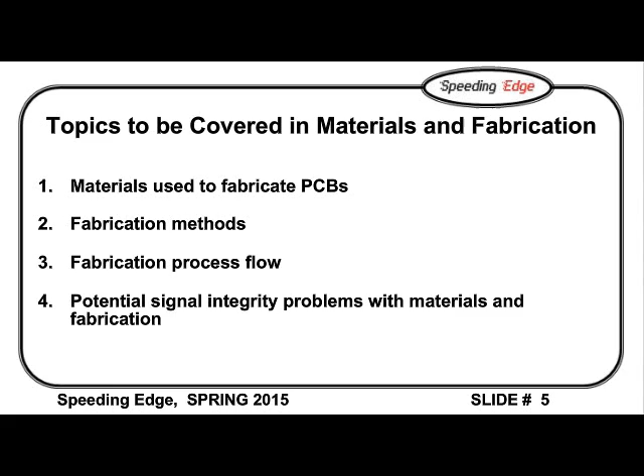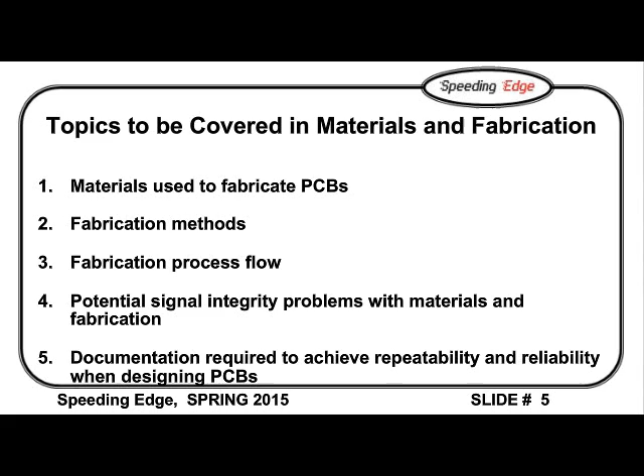So what I'm going to cover are these things, and the materials used to fabricate boards. We need to get much more involved in that. We also need to get involved in how boards are made, and I'll mention the methods that are available to us. You need to know how the flow is conducted in a fab shop so you know where things can go wrong and keep that from happening. And I'll show you some of the SI problems that are traceable to how a board was built or how material was chosen. And then I'm going to close with the documentation that one has to prepare so that the fabricator knows what we're asking for. You'll see later on it's much more extensive than is traditionally done.

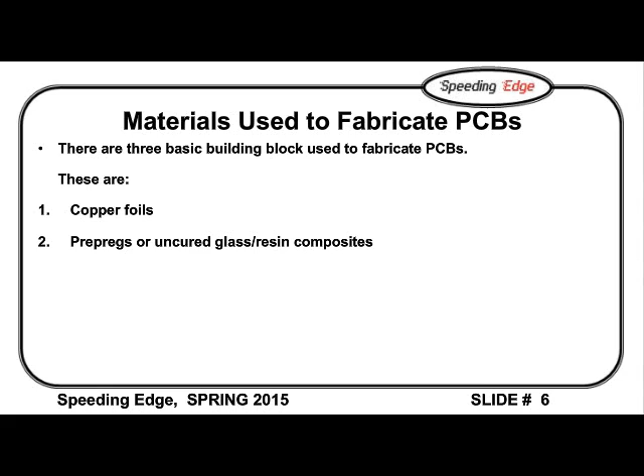So let's look at the materials available to build a board. There are 3 basic building blocks that are involved in building a board. The first one of these is copper foils that form all the signal and power layers. The second is a material called a prepreg, which is glass cloth saturated with resin which has not been cured. That will be the glue that makes our board stick together during lamination.

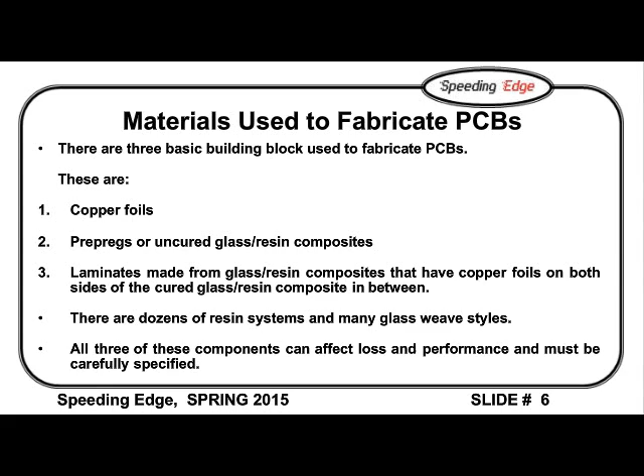Then there are cores, which are that same glass resin composite with foil on both sides that has been cured. And that's going to be all the inside layers of our printed circuit board. And there are dozens and dozens of resin systems out there and lots of different glass weaves, and so many to choose from, many of which are not going to do what we want. And every one of these 3 things can have an effect on performance and loss. And failing to control those is one of the reasons we have disconnects.

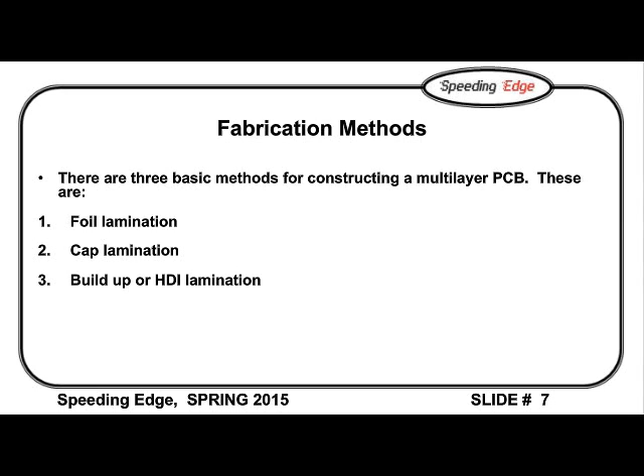So how are boards made? Well, there are 3 basic ways to construct a multi-layer printed circuit board. The first one is what we call foil lamination. Second is what's called cap lamination. The difference between those 2 is between layer 1 and layer 2 of foil lamination is prepreg, and between layer 1 and layer 2 of a cap lamination is cured laminate. And then the third one, which is the workhorse of cell phones, is build-up or HDI, where there is a combination of both 1 and 2.

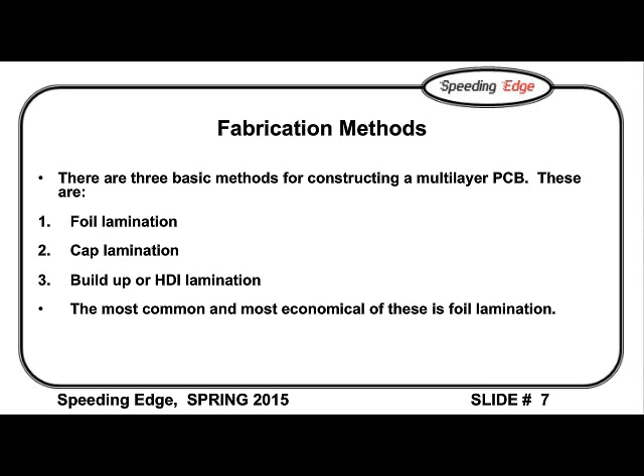And of these, the most common and the most economical is foil lamination, and all of us should attempt to get our jobs done with that. There's lots of good reasons to do that besides economics.

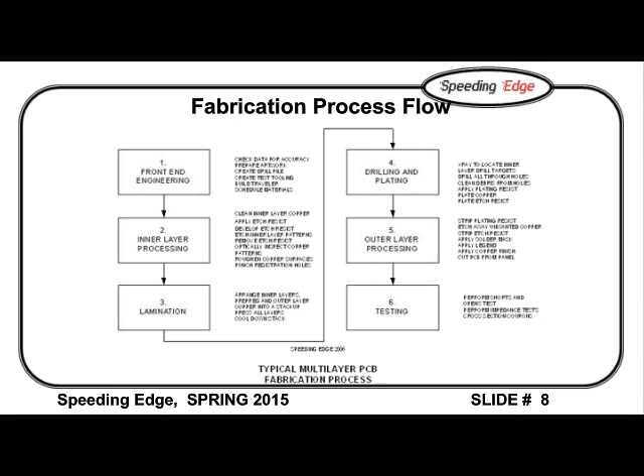Here is the process flow, and this is the flow that would be followed with either foil or cap lamination. All your technical information goes to a fabricator who makes all the tooling involved, and then inner layers are formed 2 at a time on pieces of laminate. Those are combined with prepreg and foil, and the whole pile is run through a lamination step, after which we drill and plate and etch outer layers. And there are 2 or 3 places in that flow that SI can be compromised. I'll mention those in a minute.

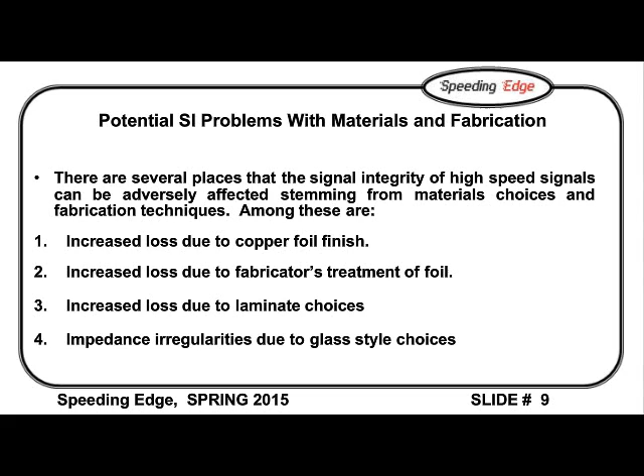So here is a look at part of the data I draw on. In order to have good data to make choices, I have had to build test boards out of everyone's materials so that I get a one-to-one comparison. And this particular data is for one of my test boards where half of the signal layers were real smooth copper and half were the standard copper that we will get if we don't ask for something else. And these are 8-inch traces. The only difference is the foil roughness that came from whoever made the foil.

You can see the blue line is what's called VLP, or very low profile copper, and the green is reverse treat, which is the standard copper. And you'll notice out at 14 gigahertz, which is 28 gigabits per second, there's 2 dB of difference just because of how the foil was manufactured.

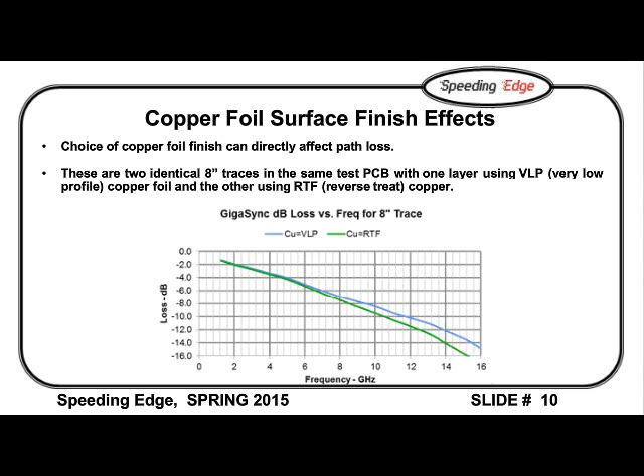There's a couple of pieces of data missing here. I'll fill you in on what that is. This is 2 boards made with the same artwork and the same material at 2 different fabricators. What's missing at the bottom of the 2 graphs is the left one should say 35 dB at 8 gigahertz. The right one should say 40 dB at 8 gigahertz. That is a 5 dB difference and is traceable to how the fabricator treated the copper during the lamination process.

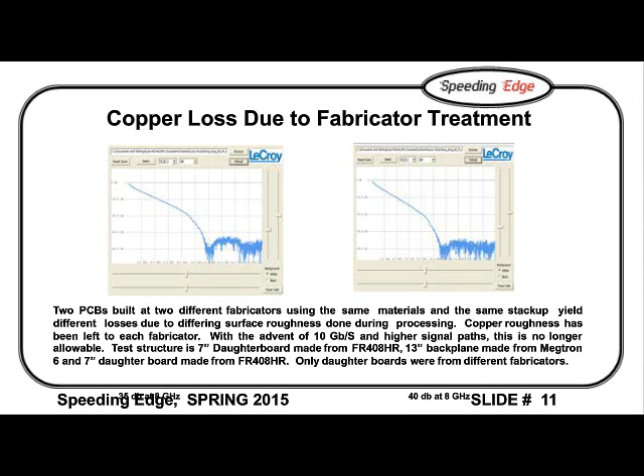Again, at DesignCon, I'll have photos of this so you can see what that looks like. So we are going to have to control how the fabricator does their job to avoid this problem.

And this one next is a chart of dielectrics. The same set of test boards was built, you can see here, 6 different laminates, all made with the exact same test board. And the range of loss is significant, where the red one is what most people call FR4, and the top one, which is blue, is the latest out, called Tachyon from Isola. And so you can see if you don't exercise control over the laminate, you get wide swings in what the loss looks like.

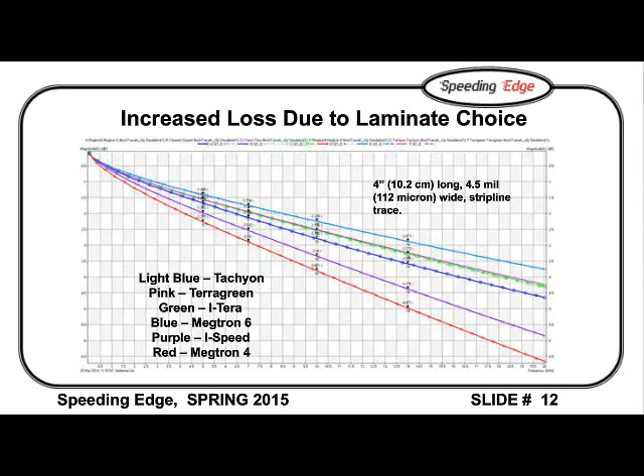Here we have a picture of 2 glass weaves commonly used to make printed circuit boards. The one on the left, 1080, has been the workhorse for as long as I've been in the business to make a 3 mil core, or in some cases a 4 mil core. And on the right is 3313 glass weave used to make a 4 mil core. And you can see the difference between the two is in how the glass is distributed across the surface. On both of those, there is a 3.5 mil wire to give you scale of what a trace looks like compared to the weave of the glass cloth.

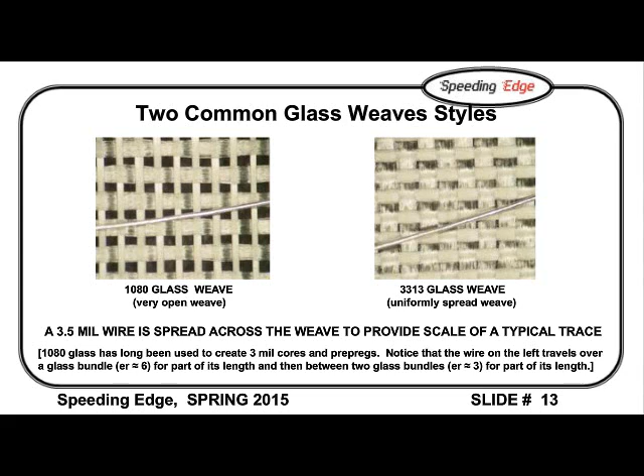Notice on the left side that with 1080 glass, the wire is for part of its length on top of the glass bundle and for part of its length in between. What's going to turn out there is, because the dielectric constant of glass and resin is so different, where the trace is on top of the glass bundle will have a low impedance, and in between glass bundles a high impedance, and those variations are going to cause reflections along the line that are unanticipated, and that shows up as 2 things. One is loss, and the other, outside the topic of today, is this is where skew comes from.

And this slide shows impedance versus time for those 2 traces on the last slide. On the left-hand side is the 1080 glass. This is one trace running over on the same layer, all same width from one end to the other, and you can see how widely the impedance swings. Where the line dead through the middle is 50 ohms, the top line is 55, and the bottom line is 45, which is the typical plus or minus tolerance of a fab shop.

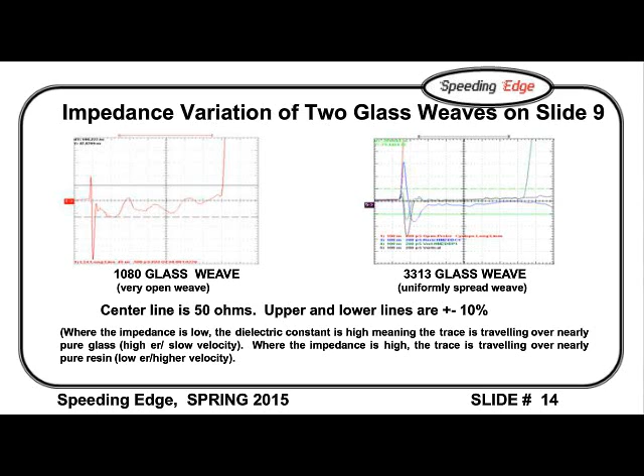On the right-hand side is 3313, which is called spread glass. You'll notice that the impedance is very nearly flat along the length of the transmission line. And so what we have learned the hard way is one of the things you want to make sure always is that your high-performance boards are made from spread glass. Now, the rub is going to turn out to be how do you define spread glass. It's outside the scope of today, but we're working on that one.

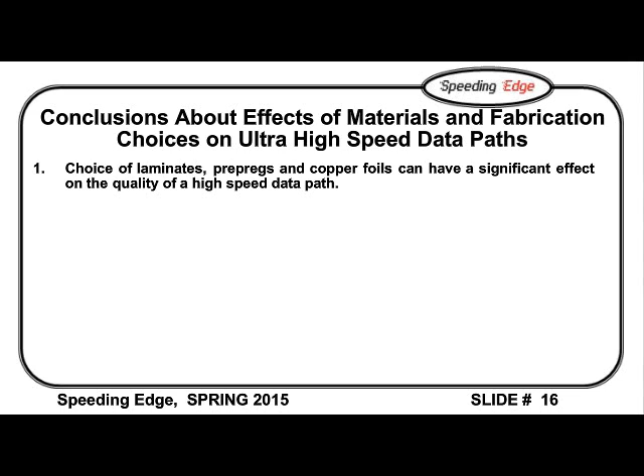One of the things I've tried to illustrate here briefly is that your choice of laminates, prepregs, and foils can have a significant effect on the quality of your high-speed signal path. The current practice in fabricators doesn't account for the things that I have shown you here, and that has, again, a lot to do with why we have correlation problems. There are two other reasons that Heidi and Al will talk about, but these are the ones that you will see stem from how the board was made.

So here's the good news. First of all, we need to control these parameters if we want to get repeatable results. Then we've got to prepare documentation that is complete enough so we get what we were looking for. And this last bullet I added because we have allowed fabricators in the industry to change things on our stackup to suit whatever their current inventory is or practices, and that is, to be mild, hazardous, so that has to stop.

We're bit by bit getting fabricators trained this way, but it's a habit, and unfortunately, I've seen fabricators change things and not tell me, and I get to throw away a lot of boards. A whole other topic is how do you keep that from happening. That's the basic intro I wanted to put together to set the stage for the next two sections.

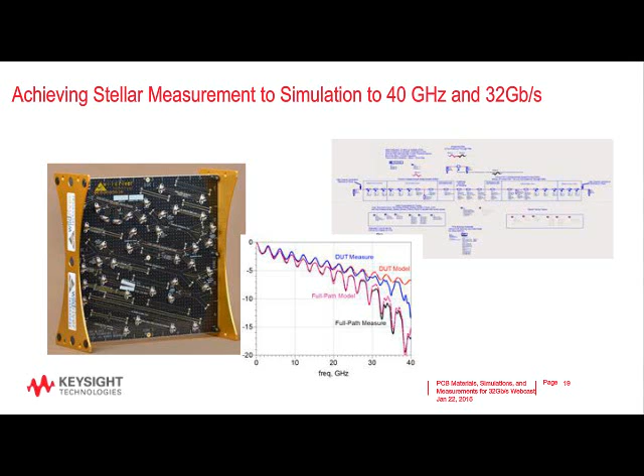So multi-layer laminate printed circuit boards are everywhere in today's electronics. One would think that a technology that has been around for more than 50 years would be easy to simulate and measure, and yet for the niche of high-speed signal integrity applications, it is not easy. In part one, Lee Ritchie did a great job in explaining how PCBs are fabricated and the key features controlling high-frequency performance. Now I'm going to demonstrate a methodical approach to achieve stellar simulation to measurement correlation to 40 gigahertz for data rates up to 32 gigabits per second.

Here is a very simple printed circuit board structure. You would think that this type of simple structure would be easy to simulate and easy to measure. It is simply a trace, or in the case of a high-speed signal, a transmission line with an adjacent return path that defines a characteristic impedance of Z0 equals 50 ohms. In the middle of this trace is a 1-inch section where the trace width is increased by 3x the width of the 50 ohm trace.

This is a type of series resonant Beatty standard that is commonly used in verifying the calibration of high-frequency network analyzer measurements, and we will use it here to calibrate our measurement-based models and verify the accuracy of our measurements and simulations. This simple structure provides a calibration in the time domain by showing the stepped change in impedance, and calibration in the frequency domain by showing the resonance of this 1/4 wavelength resonant structure and the frequency-dependent losses.

Now let's look at how we can get the simulated eye diagram we have here at 32 gigabits per second to match the measurement we took at 32 gigabits per second. It is really not very easy. Why and what is involved? So I've been working with Al Neves for a while with his CMP28 test structure platform, and this is one of the things that he's always saying, that it is really not very easy.

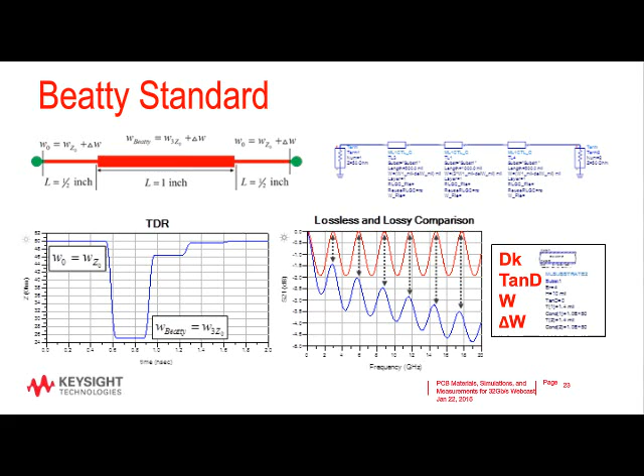So this Beatty standard adds a stepped impedance change for gaining information on the as-fabricated etching and the PCB dielectric height with this impedance change. With one simple standard, one can verify the as-fabricated PCB stack-up properties for high-frequency performance and avoid using up valuable printed circuit board space for multiple standards in your design.

So there is one problem. I want to simulate the Beatty standard, but in the measurement, as you can see in this picture, I also have the connectors that go from the coaxial reference plane of our network analyzer measuring system to the planar transmission line on the printed circuit board that attaches to our Beatty standard. So what do I do?

Here's a simple cartoon of the problem. It shows that typical instrument calibrations are done to the end of a coaxial connector. But the start of our Beatty standard is on the PCB. So how do we remove this coaxial connector transition to the planar PCB transmission line that we call the fixture? To do this, we will leverage the experience of the network analyzer world and the use of S-parameters with a little bit of matrix math to move the reference plane to match with our simulations.

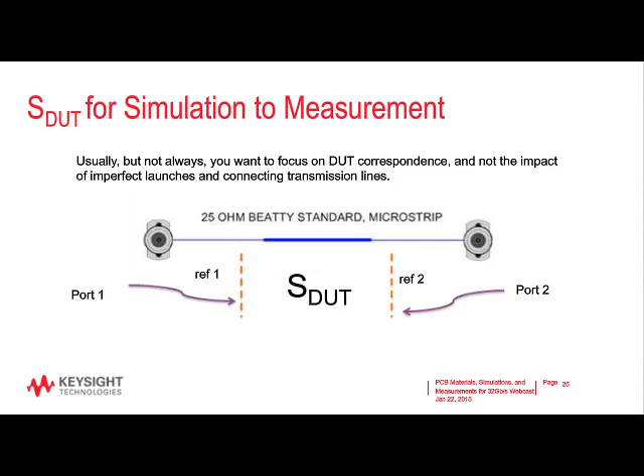There are numerous ways to measure the S-parameter model of a fixture, as well as creating deconstructed measurement-based models of the fixture. Next week at DesignCon with Lee Ritchie and Al Neves, on Tuesday with the tutorial, we will go into more details on this topic.

But for now, let us just assume that we have this fixture model, the S-parameters for the fixture. What do we do with this S-parameter characterization of the fixture? And here we have a plot of the loss versus frequency of this fixture, as well as the reflections from it, the return loss.

With the S-parameters, we can use this in simulation. First, we can do a bit of matrix math made easy by simulation tools to de-embed or remove the effects of the fixture from the measurement. Here in the upper right, you can see that there is a de-embed symbol for the fixture S-parameters that is cascaded with the full path measurement.

The result shows how the added losses and reflections from the fixture are removed from the blue full path measurement and result in the red trace, which is the loss versus frequency for just the DUT, or the Beatty standard in this case.

So in the upper right is the loss versus frequency of this blue path, which is the measurement with the fixture still in it, and then the red path is the measurement with the fixture removed, and you can see it has less losses, and we can see the ripple of the Beatty standard a bit clearer.

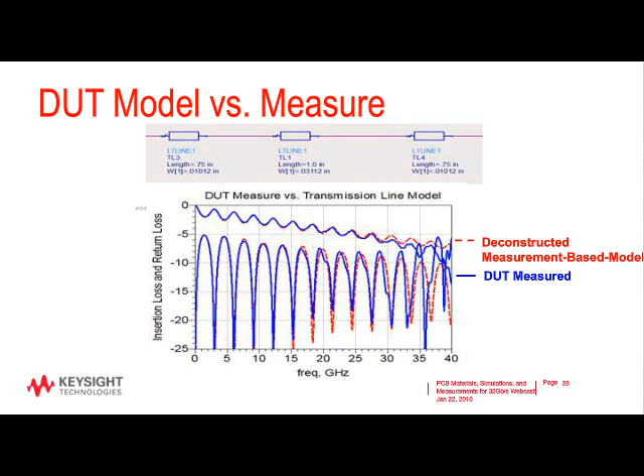Now here is a fun exercise to do, and it actually brings us a lot of information. We just talked about de-embedding the fixture from the measurement, but what about if we do not change the measurement at all? We look at the exact measurement that was done with a NIST traceable calibration to the ends of the coaxial cable, but this time we're going to embed the fixture into our simulation. So now we can have a schematic where we cascade the S parameter of the fixture with our transmission line model of the Beatty standard.

And what's interesting is the end result now, it looks like we're getting much better correlation, because at the higher frequencies, we're actually seeing that with the full path measurement, the signal is actually rolling off, and potentially our fixture model and our fixture performance is rolling off at those higher frequencies. So here we're getting very good correlation. We're able to predict with simulation that full path measurement, which is also what we do when we actually generate, or let's say measure, an eye diagram.

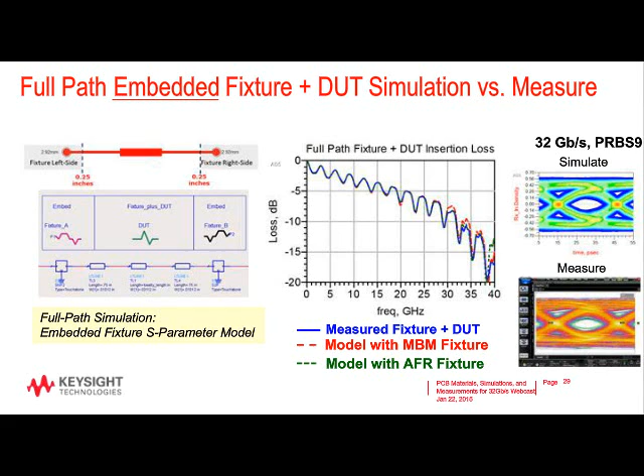So by using this methodology, we have calibrated the as-fabricated material properties in our simulations, as well as verifying the ability to characterize and de-embed or embed the fixture from our measurements and simulations. And here we can see at 32 gigabits per second, we're getting a good correlation between our eye diagram for this PRBS9 signal for simulation as well as measurement.

So just in summary, what we've validated with Wild River Technology's CMP28 ADS starter kit and the Beatty standard: first we need a fixture model. Then we need to remove the fixture from the measured data. We then calibrate and validate our simulation model, our transmission line models, with the measurement of just the DUT Beatty structure. And then finally, we embed the fixture back in with our model and verify it with the full path measurement and gain confidence in both simulation and measurement.

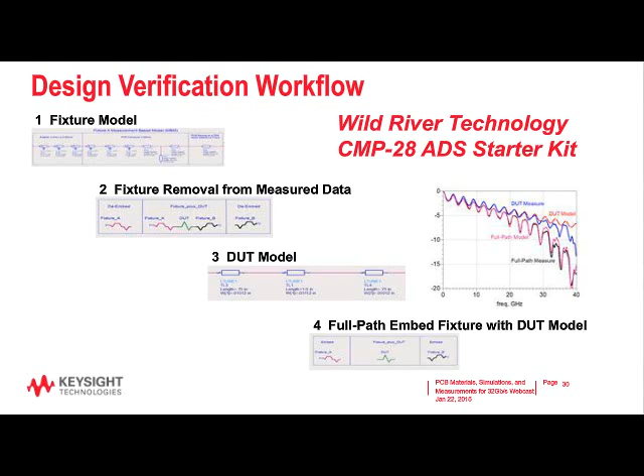So in summary, I would like to say thank you, Mr. Beatty. This Beatty standard is a very simple structure to fabricate and a very simple structure to simulate and measure.

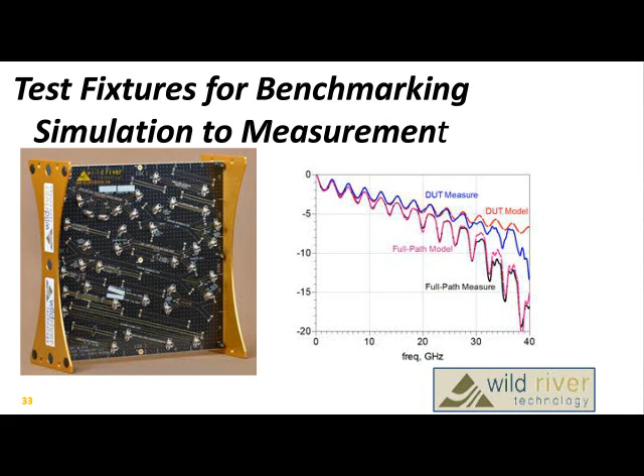Can we advance to the next slide?

We've been designing these platforms for quite a while, and back when I was a signal integrity engineer, I did quite a bit of work doing platform design. And one of the things that we learned is that, and I'm talking 40 to 50 gigahertz types of platforms that are used for simulation to measurement correspondence, you have to think in a sense of entirety. You have to think of a sense of holism, and everything has to work.

The measurements have to be pristine. Your measurement capability has to be very good. Calibration needs to be validated. As Heidi pointed out, the de-embedding is really a challenge when you're doing 40 to 50 gigahertz simulation to measurement. I'll go in and talk to a customer, for example, they'll raise the simulation to measurement, and I'll say, well, what are you trying to simulate or measure against? And the team will get a bit quiet.

So one of the things that we're hammering in this presentation is you have to be careful what you define the DUT to be, and you have to make good measurements and then de-embed out to that DUT. That's extremely important. The other thing that we've learned recently in the last couple of years is test fixture architecture is really important. I'm going to show an example of that. Moreover, the general signal integrity has to be really pristine. And an example of that is...

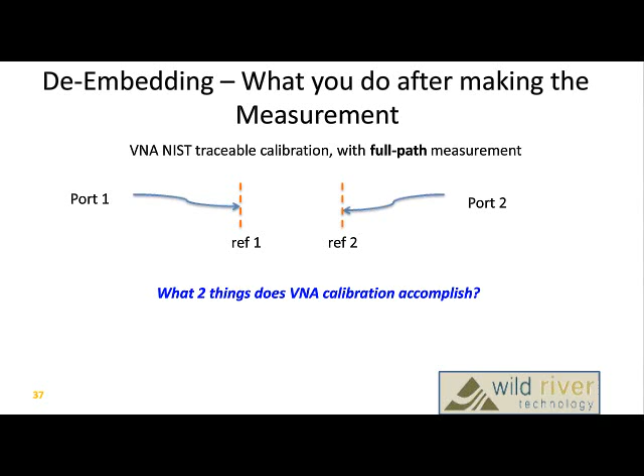De-embedding has been a real problem for a lot of signal integrity engineers. And about 10 years ago, the first thing that I worked a lot on is TRL calibration. And we're abandoning TRL calibration as a way of calibrating. It's not really a de-embedding approach. It's really a calibration approach. It will translate the reference plane or provide you a reference plane up to your device. So it serves that function.

But you have to make a lot of measurements with TRL calibration. There's a lot of problems with the impedances, and you have to make a lot of measurements. And for multi-mode systems that we work with every day, differential systems, I don't think it's a good approach.

The two approaches that we're using are symmetrical calibration, as an example AFR. Keysight has AFR, and they've talked about that and done quite a bit of application development. That works pretty well. We like that a lot. It gets me an answer real fast. Make a measurement, and it'll bifurcate, and I'll talk about that in a second, and give you two S parameters that you can use to de-embed.

We did a lot of development in this, and we'll talk about this next week, on measure modeled. It's a lot of work, but you get a lot of insight into the system. And the accuracy is somewhat comparable to automatic fixture removal. There's quite a bit of work in the measure-based model. It does have some advantages. Of course, the disadvantage is it takes a lot of time, and you really have to understand what you're doing. It's not a simple thing to do the measure-based model. Next slide.

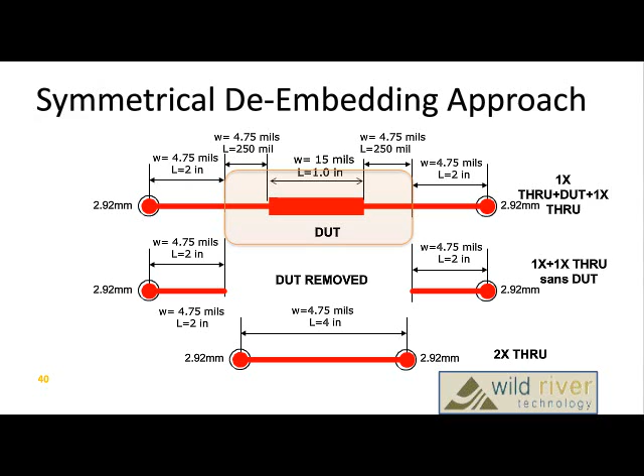So this, I've run into engineers who are new to this, and I wanted to cover this on de-embedding. What basically you do is you take a structure that's a through, and that has to be designed very consistent with your actual DUT plus your network. So at the top, that's our structure we want to analyze and do simulation measurement. So what we do is we pull off the launches to the left, and then we create a through. So there's a through associated with the actual DUT structure. Okay, the next slide.

In the case of automatic fixture removal, or any of the symmetrical calibrations, you would measure the through, and the algorithm bifurcates the S parameter that you measured into a left and a right-hand S parameter. And the left hand is used, you either can do it in ADS, or you can do it in a software like PLTS, or MATLAB also works. So you can do this directly in the VNA, or you can post-process the S parameters.

I prefer to do it in ADS, frankly, because I like to make my measurements and do an S parameter workflow on the measurement, and then I take the bifurcated S parameter and I use that in a post-processing step in ADS. ADS really handles de-embedding really well, and it's all graphic. It's really easy to use. I like it a lot. I'm not trying to market that. It's just I'm telling you what our approach is.

When you go to the next slide. I think somewhere someone's cranking a handle, and it's like, next slide.

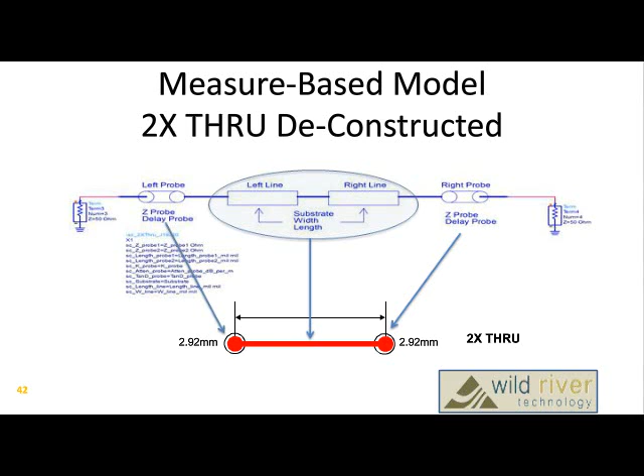So in the measure model-based approach, that's another way of getting the S parameter. And when you do the measure modeled, you're not just measuring the through and passing it through an algorithm that bifurcates the S parameter and gives you the left hand and the right hand path. You're modeling the entire system symmetrically, and then you're going to divide that manually. So you're going to model both the launches, and then you're going to bisect that model. Next slide.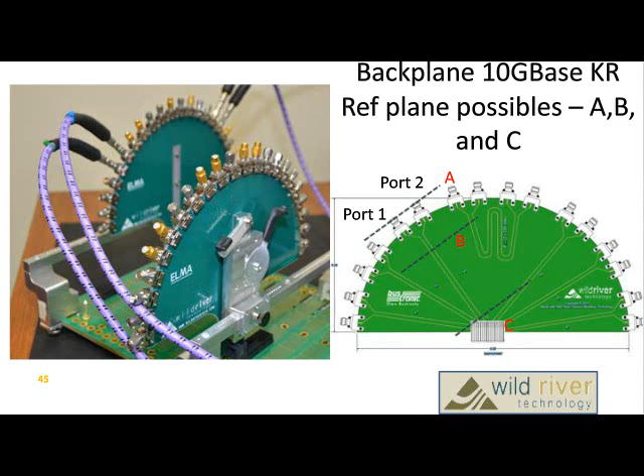Okay, so advance the next slide, please. What we did is, and we also didn't know where the reference plane was. The spec is a little ambiguous, whether you're at a connector or down in the transmission or right up to the connector. So we built, and we did this on the same panel, we panelized a companion card.

Now, if you look at this, there's obvious things that I wouldn't do if I was doing 40 to 50 gigahertz on this platform. So this is really about a 20 gigahertz platform. But what's really beautiful about this approach is I have a separate independent card that was panelized with the daughter card, so it's the same stack-up materials and so forth. And essentially we were able to do a lot of stuff with that panelized calibration card.

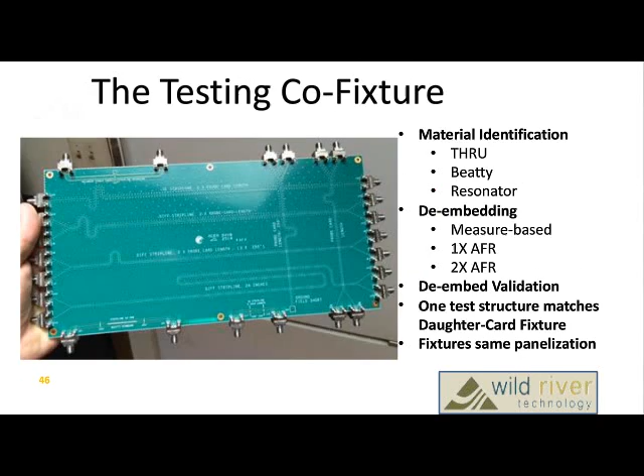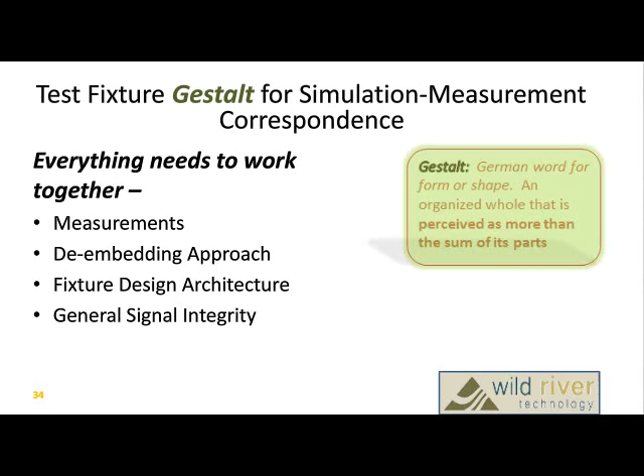Yeah, can you hear me okay? Sounds good. Feel free to comment. What happened to the slide? Hello, where's my 44? Oh, 44? What slide was that again? The question from the audience says slide 36. Oh, 36. But you've got to add the dummy slides ahead of that to come up with the correct answer. So you probably are talking about 44. Yeah, I think they're talking about 44. Yeah, let me push that one back. Perfect. Okay.